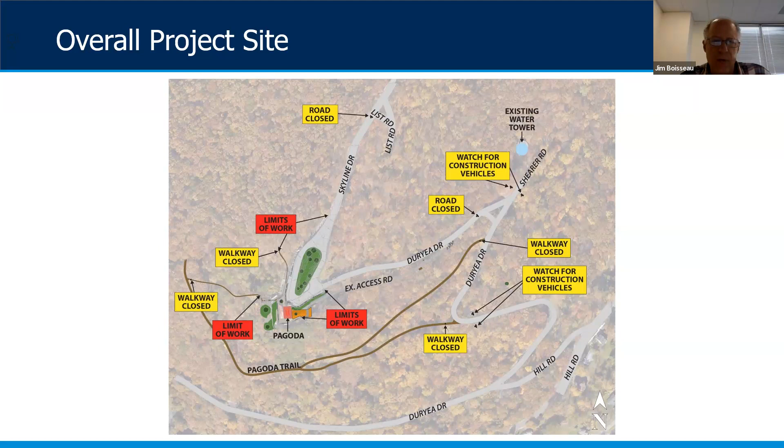So what we're seeing here in this slide is part of what we've been asked to do is to also maintain the construction site, allowing a maintenance of traffic through the site for the contractors, as well as providing access around the site without impacting the overall maneuverability at the top of Mount Penn. So we'd be looking likely at about a 2-year construction time frame to do our work around the Pagoda site.

So we have some road closures, maintenance of traffic for construction vehicles, warning signs, and also maintenance of traffic and closing off the walkways. The reason for this is when we start rehabilitating the site, as we'll see later in a few more slides, we'll be moving large materials around for the restoration of the walls, the stabilization of the walls, and stabilization of the terraces, walkways, and bringing the site back up to code.

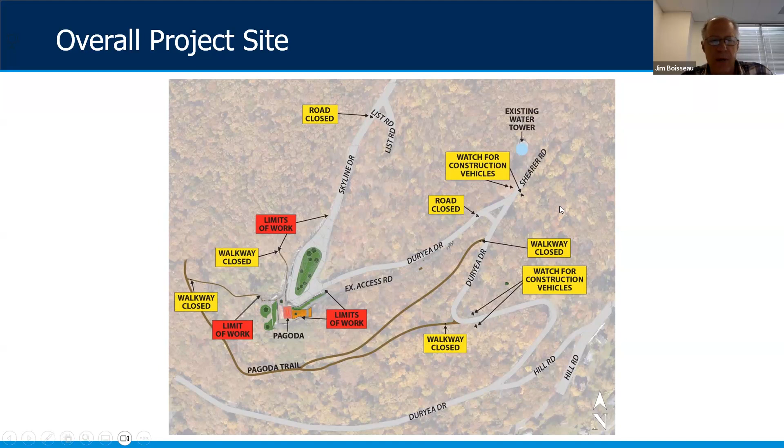So our limits of work are really focused within those red areas that we see, and we'll be starting here. Perfect, Dave, thank you. So now we're drilling down more into the actual Pagoda site itself.

In general terms, we have a number of walls, walls 1 through 5, and it's interesting that each one of those walls is constructed differently and in a different time frame. As we remembered from the postcard, the walls right at the terrace that provide stability for the terrace and around the pagoda, and also part of Skyline Drive, were built back in 1908.

Now why that's important is back in the day, the construction procedures and means and methods provided for a dry laid stone wall, meaning each stone is not mortared together, but they're pinned, and there's space between them. So we're approaching almost 115 years of exposure to weather, water, drainage, and traffic loads on the terrace.

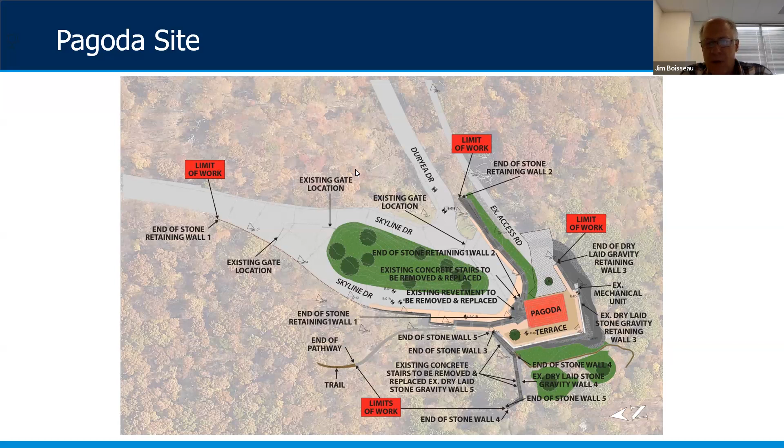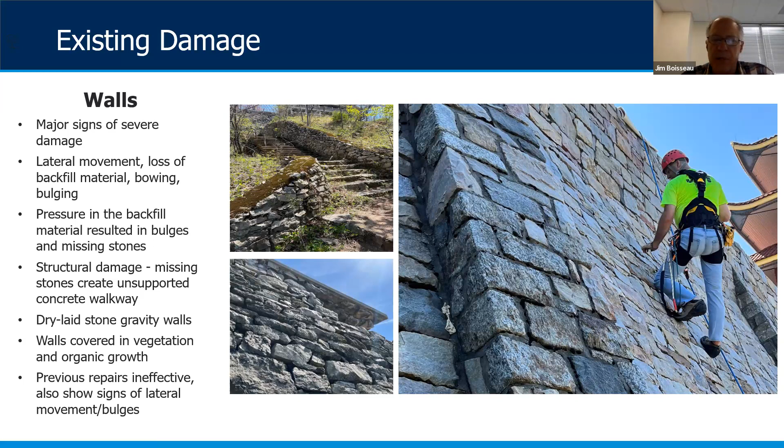The photograph on the right-hand side shows different conditions along these stone walls. This is one of the stone walls built back in the 1970s from an addition where the overlook was constructed. Here we're seeing some mold, some exposure to the environment, but not to the extent of the damage of the dry laid stone walls. There's some changes in the mortars.

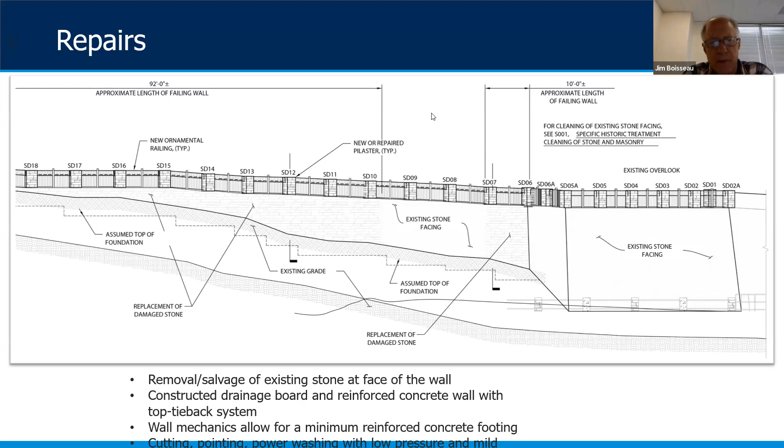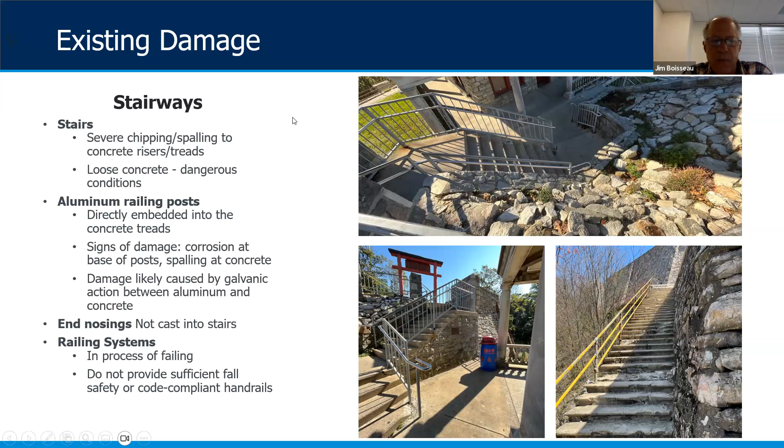One of the assets we have is we're able to take advantage of the existing bedrock. While that's an advantage, it allows us to seat a minimally constructed footing into the bedrock and use that as a key.

And then we can also come back up at the top and place in tiebacks and a new concrete wall. And then once we put in the new concrete wall, we can place stone that we can either salvage from our stone that we take off during the demolition process, or we can manufacture and quarry new stone that matches the existing conditions.

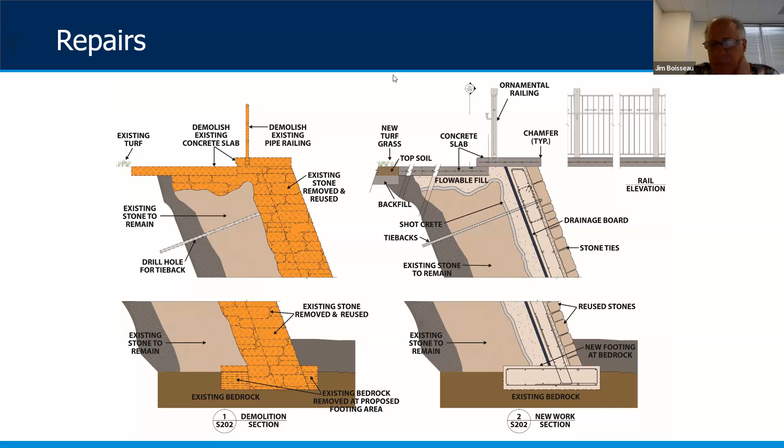So that was my thoughts on the overall project site.

Okay, and we'll move on to Robin. Let me pull that up. Dave, before we move on, do we want to try, maybe Jim can answer the one question that came up about the tiebacks? Sure, if I can see it. Let me get the right thing up here.

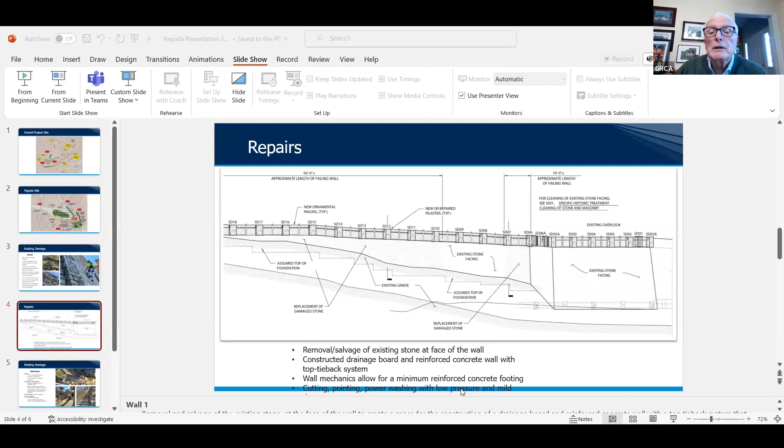The question was, is there any risk or danger of the tiebacks rusting over time and causing damage to the wall? Tiebacks are either threaded in stainless steel or a hot dip galvanized process, so the life of the tiebacks usually exceeds 100 years. We also use them in marine structures.

They're exposed to salt and brackish water. The advantage of the tiebacks also is they're encased in a grout, an epoxy grout, and that epoxy grout also has a corrosion inhibitor admixture to it. So that corrosion inhibiting admixture actually preserves and keeps the corrosion arrested.

One advantage I didn't mention is that locking the tiebacks into the foundation in the stone provides for a very minimally invasive excavation behind the wall. If we had to have a larger footing, we'd have to lay back the excavation or provide some type of sheeting and shoring. With the foundation locked into the stone and the use of tiebacks, it minimizes the excavation during construction.

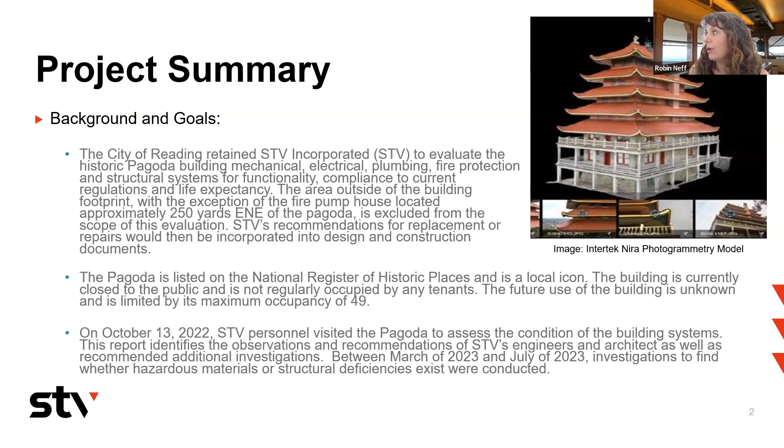So let me start with architecture. We're going to give you a little insight into what the architecture and engineering world is and how we think and present things. First and foremost, architecture from the outside.

Some recommendations and assessments we saw—it's dirty, we need to clean it. That's a maintenance thing that should be done on every building, honestly, although people don't always think about it. So cleaning it, getting the graffiti off.

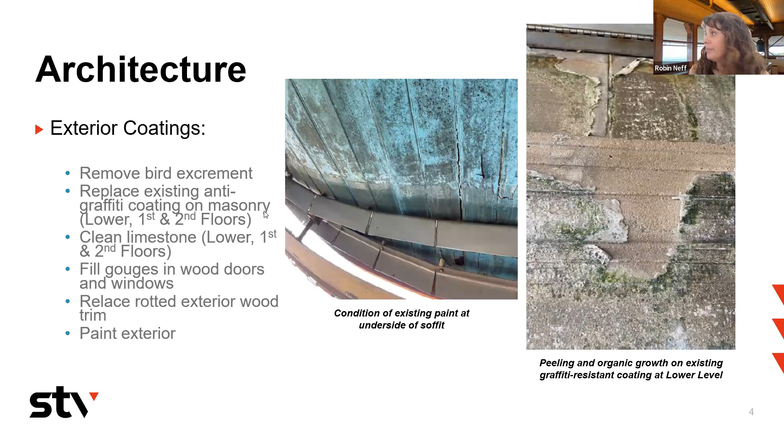There are gouges in the doors and some window sills and things, so we recommend replacing or filling them, and painting the exterior for sure. I'm just going to give you highlights of a lot of these items.

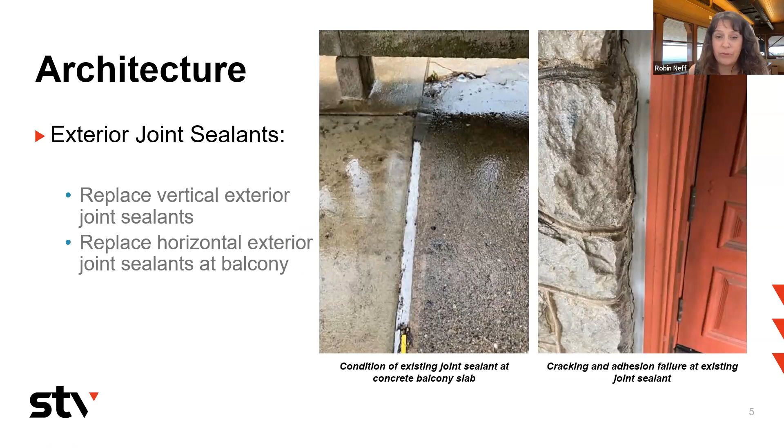Joint sealants are extremely important on a building for waterproofing purposes. When water gets inside a building where you don't want it—we've all seen windows leak and thought, oh my gosh, now this windowsill is rotted and falling apart. Joint sealants are what save your windowsills and other interior elements, so replacing them on a regular basis is highly recommended for waterproofing. That's where we observed some things that need to be taken care of on the pagoda—typical maintenance type items.

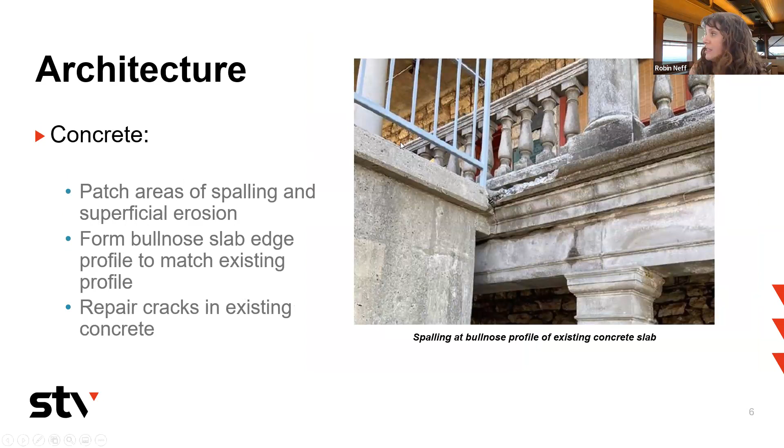Concrete—if you go out there, you see some spalling where concrete falls off, similar to what Jim was saying about the rocks falling off. When water gets behind things, they start to spall. We can fix that, and we do recommend doing that in a few areas. It's not really that bad, but we think there are some areas we need to address.

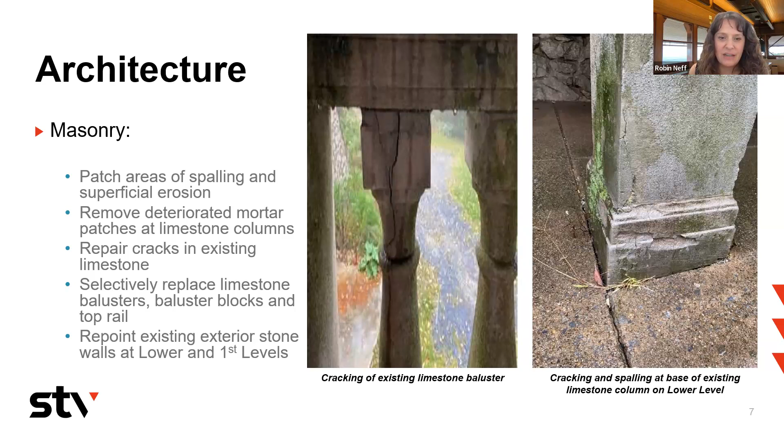Masonry is kind of similar—patching, spalling. Concrete and masonry are a little different in our world. A lot of people call them the same thing in layman's terms, but we did notice some things there. Again, nothing here is a significant issue, but we do need some fixes.

Windows, talking about waterproofing—they're very important for that, as you can imagine, and also very important for interior livability, for nice things to be able to see out the windows. We did notice some leaks, nothing too significant, but we definitely want to make sure those get repaired. We're also looking at a few exterior casings that were missing—again nothing too significant, but we'll definitely repair those sealants.

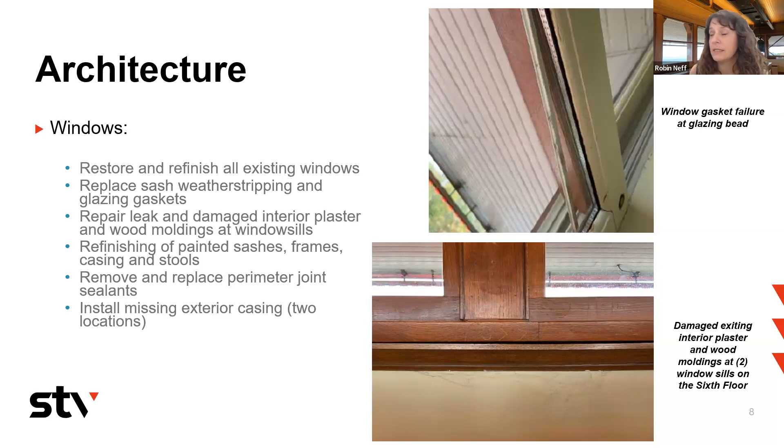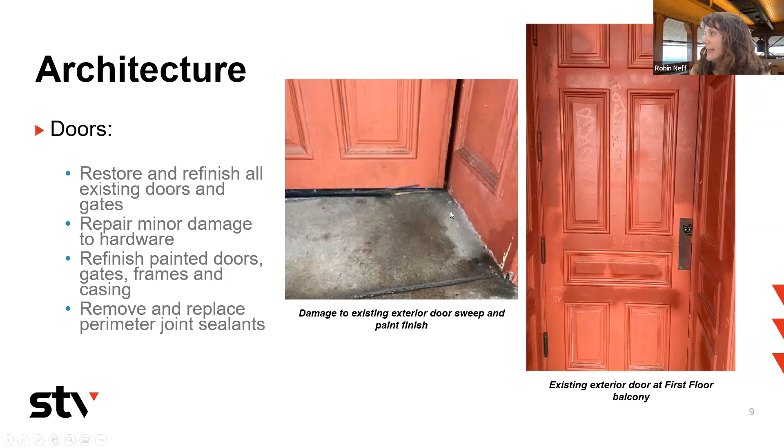Doors—restoring and refinishing. This is a historic structure, so we want to be mindful of that and do everything to honor the history of this building. Restoring and refinishing is the typical way to go—we're not going to replace a lot, we want to restore, refinish, and repair. So we do need some repairs on the doors.

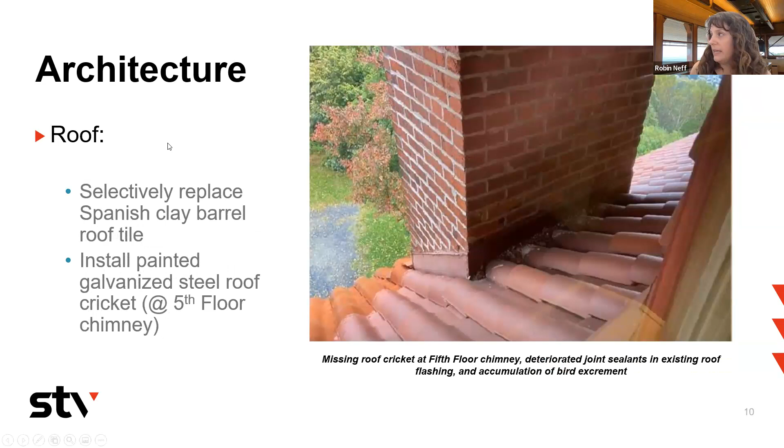This is a tough site. Jim, you had some visualizations of these walls, and obviously we're on a hillside. Accessibility is tough - to be able to get a wheelchair or someone who needs assistance, or stairs are a problem. We don't have an elevator here, so how do we do this? But what we can do in a historic structure is at least get something on the ground level. There could be a larger need to possibly get an accessible entrance with some accessible parking down to the bottom. Not sure how that's all going to work - I'm just throwing out ideas.

But we do recommend that since the restrooms need to be upgraded, we go ahead and make them ADA compliant.

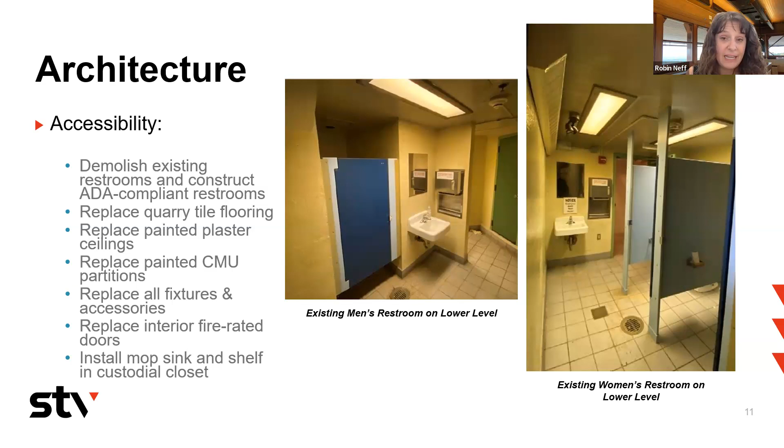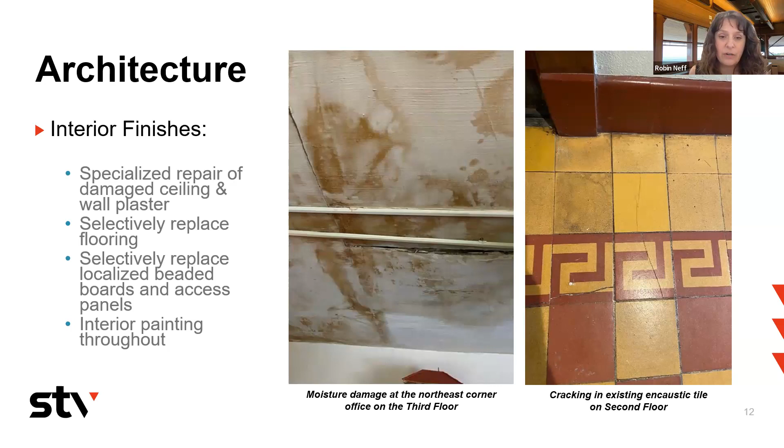Some other miscellaneous items, the kitchen appliances - this goes to, I think I saw a question in the chat earlier about what are we going to do with the Pagoda. That's a great question. I'd love to have the answer as a designer, so we can make this what you guys want it to be, but I don't think we know yet. I think it's still to be determined what we want to do here, so we're going to make it as flexible as possible for that.

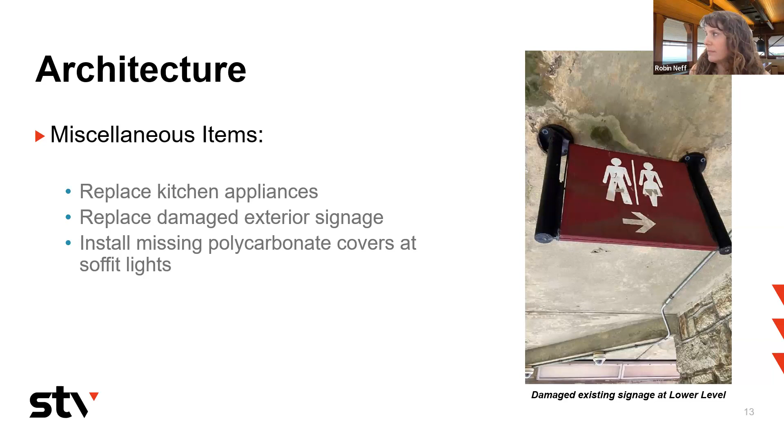So replacing the kitchen appliances, if there's a desire to have a kitchen in there, then we would do that. There's some exterior signage that I think we can upgrade and make more desirable, some lighting repairs as well. So that was our architectural piece.

Structural is our next discipline I'll go over - you're going to see a little bit of duplication here, little nuance differences. Exterior repairs that we're looking for structurally would be cracks. Cracks are a big issue with a lot of things, but none of these cracks seem to be a structural concern, which means we're not anticipating this is going to fall down or fall off the mountain. We feel it is structurally stable. How the building was built, it's anchored into that wall or into the rock there. We are not concerned that this is sliding off the hillside at all.

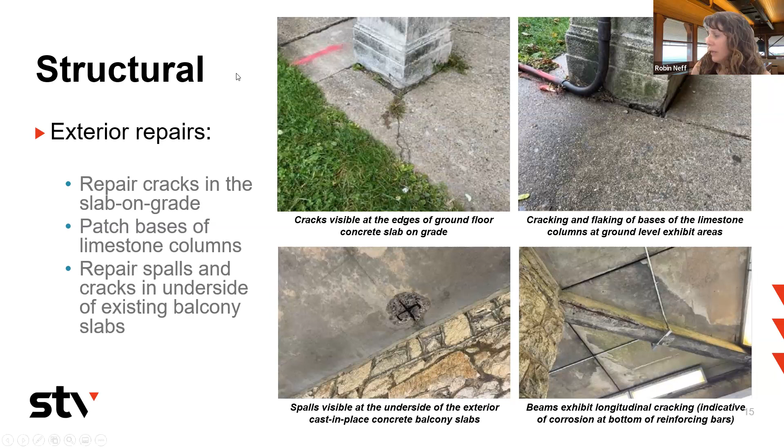These are typical types of structural repairs for cracks - limestone columns crack, flake, those kinds of things. Again, nothing serious on the exterior that we saw. A few other areas we're going to be looking at further as we design.

There's also - sorry, I've got too many screens here - some cracking of the limestone beams. We need to replace, I think, two limestone beams that are structurally deficient. They're not going to fall over today, but they are something we definitely want addressed, because when this thing comes back up and has people in it, we want to make sure it's structurally safe. So that's in our recommendations, to replace those.

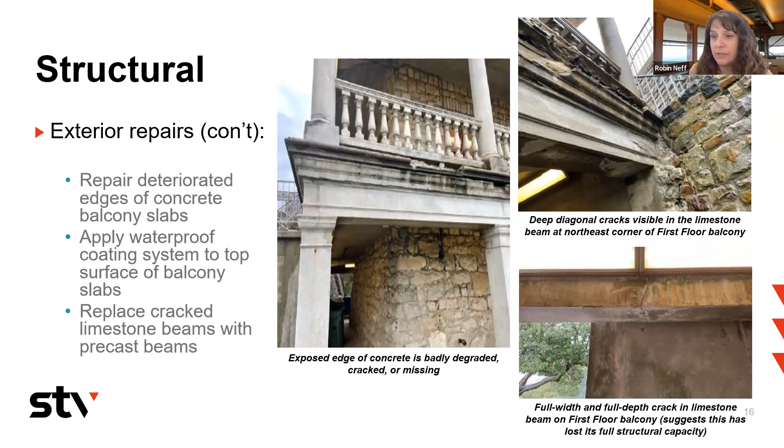We are recommending the replacement be with precast beams as opposed to limestone beams. Precast is a much more sound engineering technology than a piece of stone, and we can make it look very, very similar. We've done this in other historic projects, using precast instead of limestone - you basically can't tell the difference from the exterior, but it's much more reliable from a structural perspective.

In the interior, up on the third floor, sixth floor, which I have my picture behind me, this is in the observation area. There's a bit of uncomfortableness when I was walking up there. It seems like you feel like the floor is kind of tilting.

So we actually did some investigation in there. We took out some ceiling, looked to see what the structure looks like to determine if this thing is going to fall down, and we did not find any evidence of structural deficiency. It actually looks like there was a repair in some state. We don't know when, but definitely since 1908 there was a repair for some kind of structure. We were assuming structural deficiency previously, but this is just something that wasn't fixed at that time.

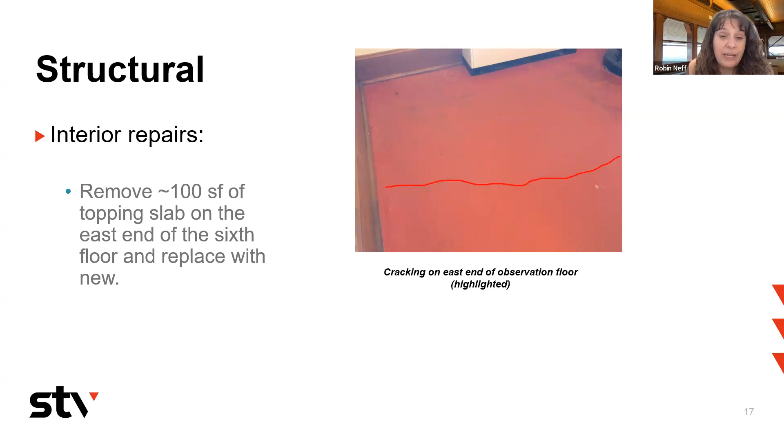So there will be some more superficial type of repair to make sure that uncomfortableness of feeling this tilting is not there anymore.

Mechanically, mechanical systems, it's got to be heated, we want it cooled. When we were there in July, it was a hot day. It was tough, and without having that cooling in there, going up and down those stairs was not fun, I'll tell you that right now.

So we'll start with heating. Heating, of course, is important. The heating system there definitely needs to be replaced. It appears to have been installed in 1990. It's not high efficiency, absolutely not. We are recommending it be replaced with a high efficiency propane-fired condensing type boiler.

We will need a propane tank, but that can be buried outside. We do not need to have that be visible. So that is how we're—oh, I'm so sorry.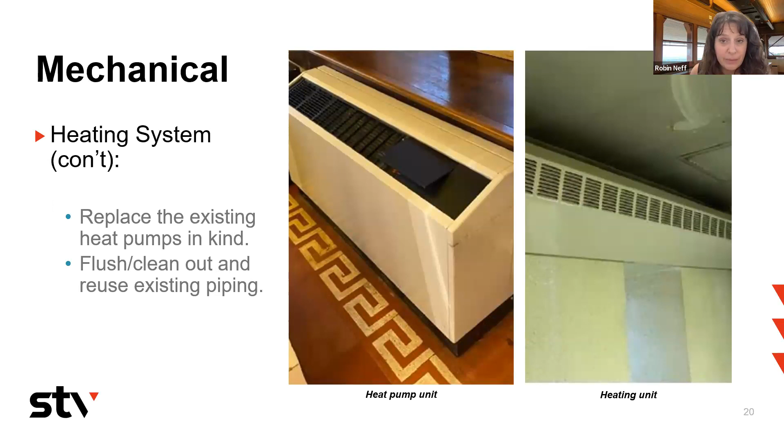This is how we're going to replace it in kind, and we're going to go ahead and reuse these pipings there. So that actually saves some costs. If we flush it out and reuse it, it's perfectly fine. The piping is in good condition as far as we can tell.

Regarding the cooling system, this is something Jim, I don't know if anyone else picked up on it. He had a little box on his one overview there that had this mechanical unit in there. So we will definitely need to have coordination between the two aspects of this project.

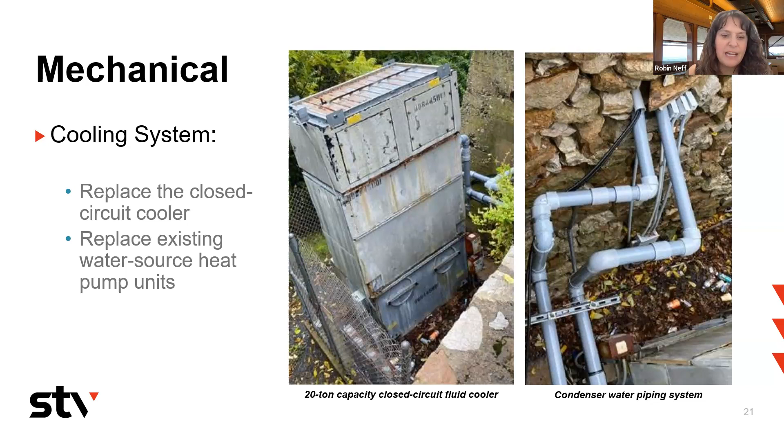We are recommending this be replaced. We will have to figure out where to put that in relation to the wall as it's being repaired, as the walls are being rebuilt. But do we maybe put this somewhere else? That's details you guys don't really need to worry yourselves about.

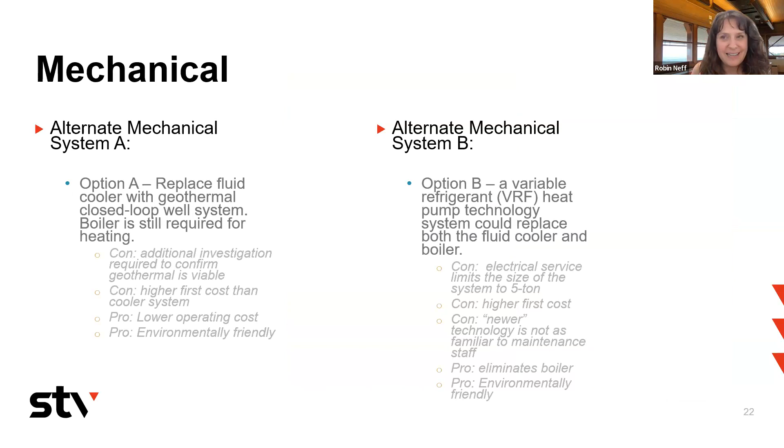This is what I was talking about, alternates. I will skip that. I just got that email yesterday, so we didn't get a chance to update our slides.

Plumbing systems relate back mostly to the restrooms that I talked about. Plumbing is not going to be an extensive repair for this project. We do need some replacement just for maintenance, typical maintenance type things with a water heater. In our homes, we all know water heaters go after 10 years. It's the same in any kind of commercial building. They last a little longer, but they still need to be replaced on a regular basis.

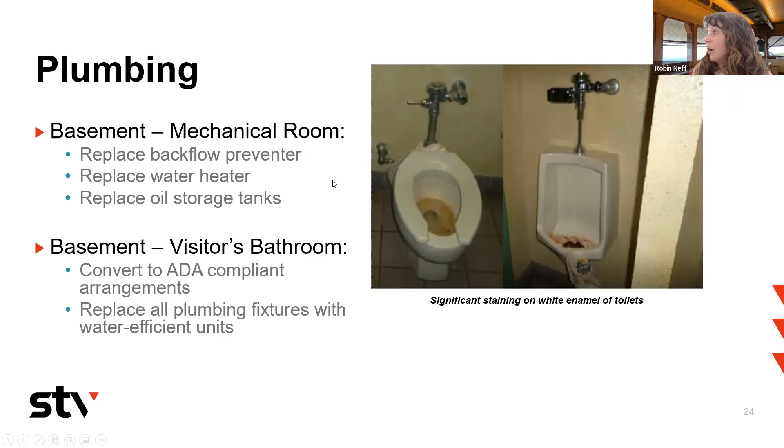Backflow preventer needs to be replaced, and then the oil storage tanks—that's dependent on the type of system we use. If we use propane, then we don't need the oil storage tanks, so we'll be figuring that out. And then we are recommending to replace all the plumbing fixtures with water efficient units in this building.

Fire protection, it is a sprinklered building, which is good. In the basement, there's also an employee toilet and wash sink.

We are recommending that be replaced. First floor prep area, again with the kitchen aspect of it—if we're keeping a kitchen aspect, then we would recommend that the sink and the hand wash sink be replaced.

There is a kitchenette area on the second floor. If that's going to stay as a kitchenette area, we would replace those.

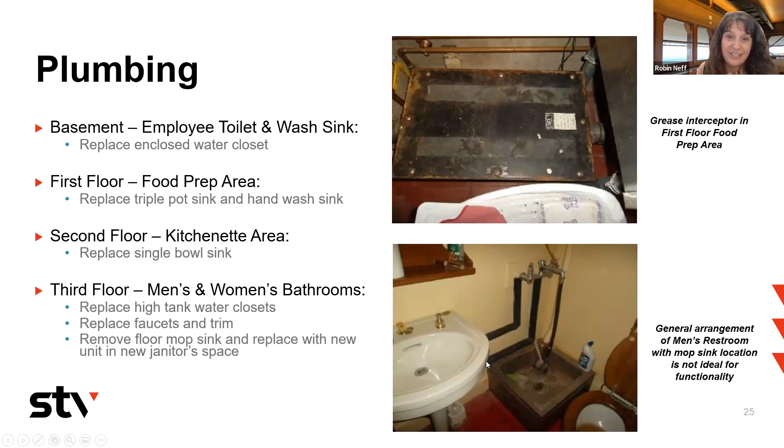Then third floor bathrooms. We have a picture of this bathroom on the third floor, where there's a janitor's closet mop sink in there. So we have an idea of how to fix that and not have it in the bathroom. I think that would be a good feature to not have.

Now I can go to fire protection. As I said, it is a wet sprinkler system already. There is a fire pump down the road a little bit, in good condition with no issues that we saw. It's been well maintained, only about 10 years old, so that's great - those things can last 50 years. So we don't have any recommendations there.

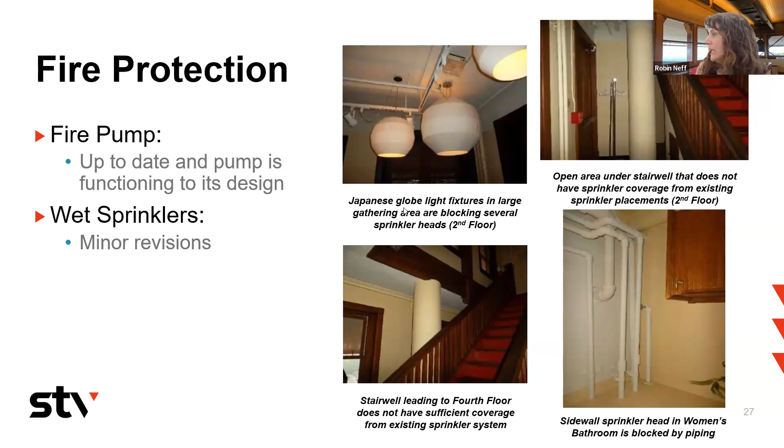Our recommendations for fire protection are pretty minor. We've got a few areas where, in design, you don't want to block heads - safety first, got to make sure this is a safe building. So a few areas where we need to make improvements, and a few areas where the heads were somehow removed. We want to make sure we get those back in there.

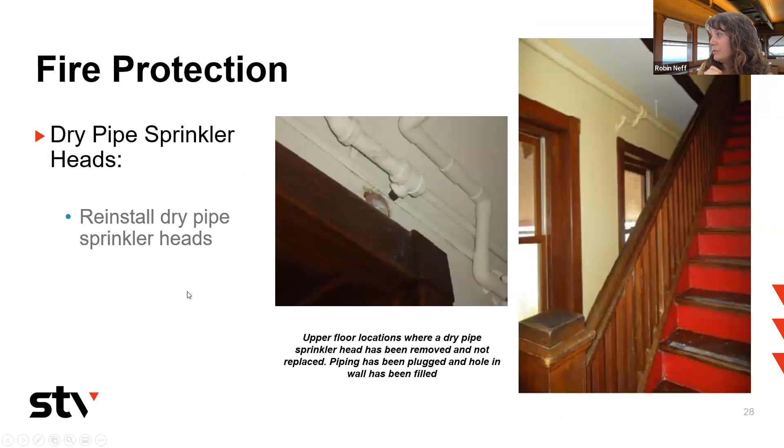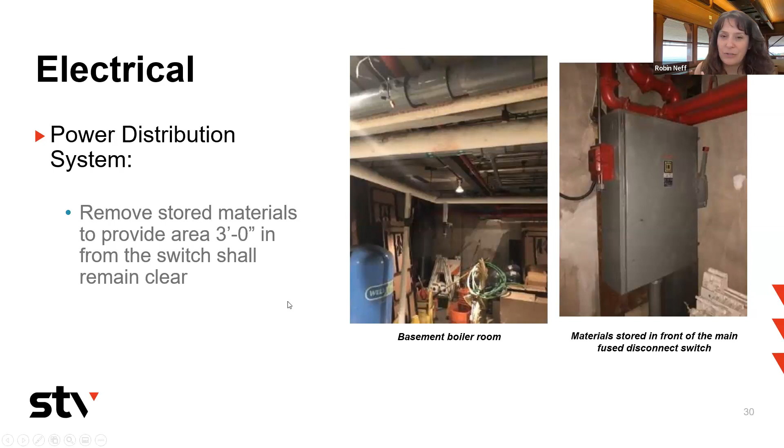Very minor. Electrical - sure, everyone's been waiting to hear about the lights. I'm getting there, I promise. The power distribution system, that's how we get the power there - that's all that means. We really didn't see any issues with it, but there are stored materials there, and that's not allowed per code, so we want to make sure that gets remedied.

Some other minor things - we've got some wireways, exposed wires that aren't per code. We've got some areas where cabling is going through holes in the wall with no kind of water sealant or water tightness. Definitely want to try to get those repaired.

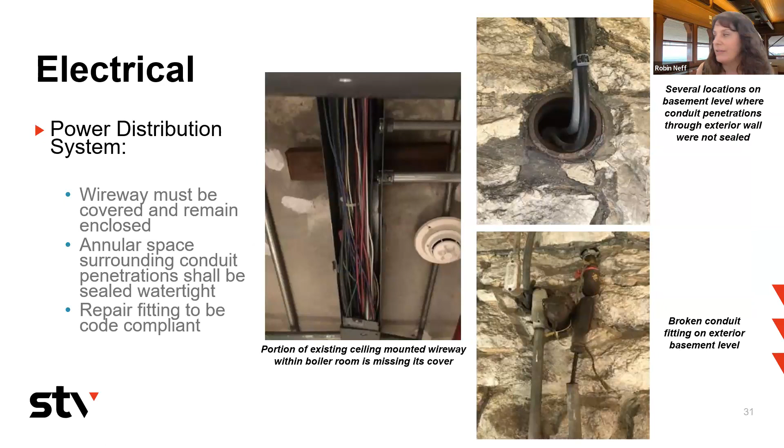Starting with the lighting system here, going interior first, there are needs to replace lighting. We're recommending to replace all of the lighting throughout the building with LED, more efficient lighting.

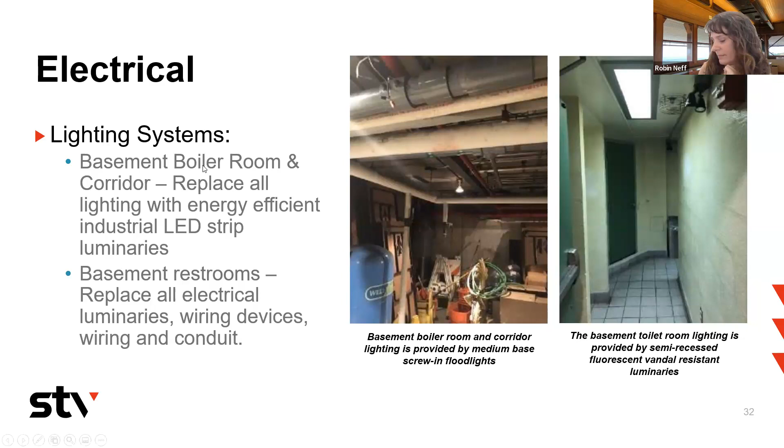So that's just a couple of pictures of the types. We're certainly amenable to putting similar lights, lantern fixtures or something else to highlight certain areas. That'll be in coordination with the city as to design and what they look like, and it depends on how flexible we want the space. We don't want to put lanterns up in the middle of an area that aren't really there for a purpose, so we want to be smart with where we put things.

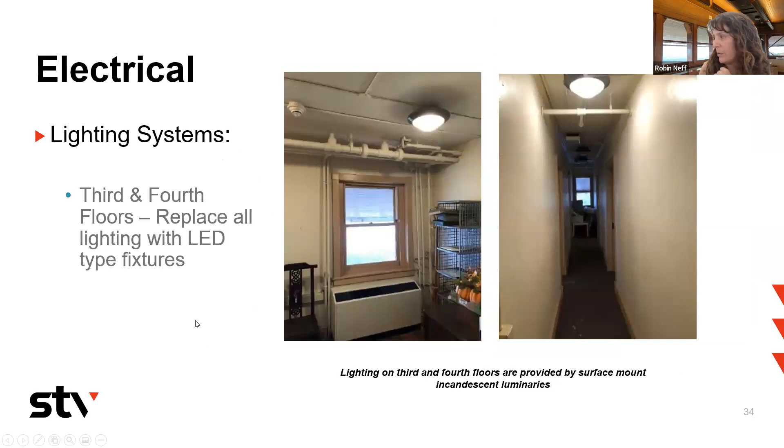Fifth and sixth floors, again just replaced with LED type of technology. And on the exterior, bottom up - everyone's been waiting for what we're doing with the lights - there are some at the bottom level. Again, safety - we want to make sure this is a lit, safe space for people, and we are recommending they be replaced on the outside as well. There's a few that just need to be retrofit because we want to keep the look historically, so we're going to retrofit them with LED.

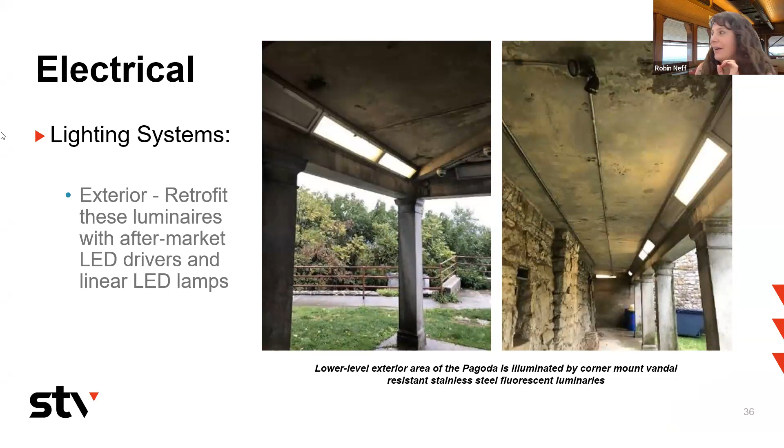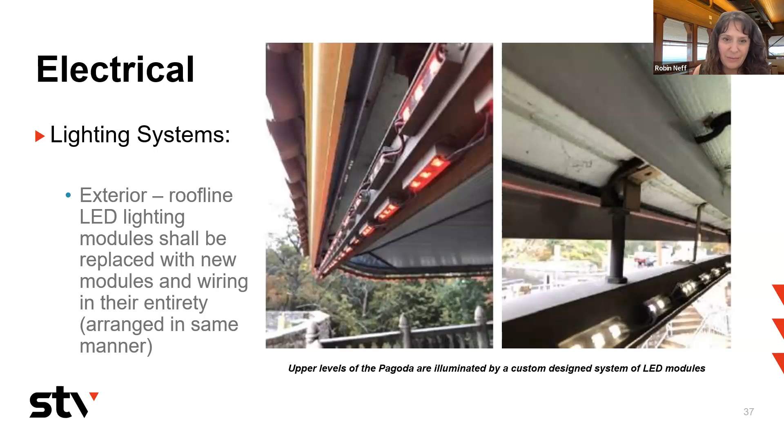Here, drum roll - roofline, the LED lighting, everyone knows about the Pagoda. We do recommend that it be replaced. We're looking to put in a full custom design system, LED modules with all new wiring. What we're going to be able to do here is have it programmable - we'll be able to do whatever colors you want at any time, make them pastels for springtime or fall colors in the fall. On Christmas Eve, of course, we'll be able to do flashing reds and greens and whatever we want to do. That is a recommendation.

Now back to the boring stuff - emergency lighting needs to be all replaced throughout. So that was the lighting.

Also CCTV - we know that this is an area that is kind of remote, so we want to make sure that's hooked up and is working.

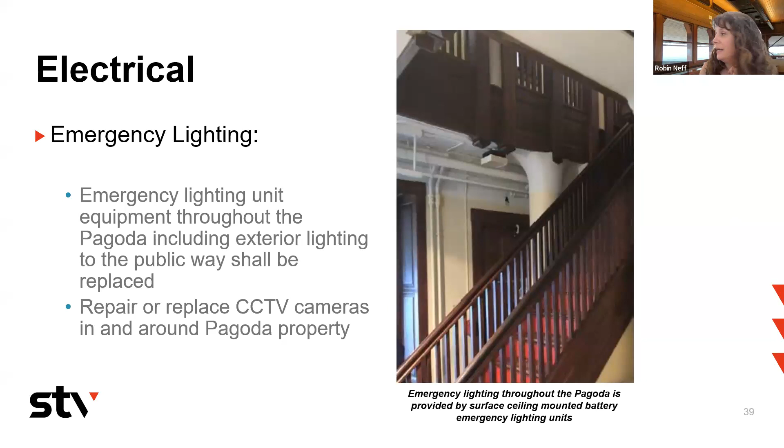Some additional investigation - I mentioned hazardous materials. You may all be interested in what we found. We did not find anything we didn't really expect. We do assume there's some asbestos in there, but primarily the ceilings are not asbestos. This is not going to be a very intensive project to have to remove hazardous materials.

There is certainly lead in the paint. Anything prior to 1970, 1980 really is going to have lead in the paint. So it's a concern, it's something we have to address, but it's not a primary thing.

Asbestos is a little more significant, and it's not that there isn't any, it's just that we didn't find it nearly as much as I would have assumed in a building of this vintage. And we do have polychlorinated biphenyls, that's also not very typical in a structure of this age. But it is definitely able to be remedied.

And I already touched on our 6th floor investigation there with the sloping floor, and we very surprisingly, honestly, we're happy to see that something was already repaired, and it looks like we're not really in any kind of danger there.

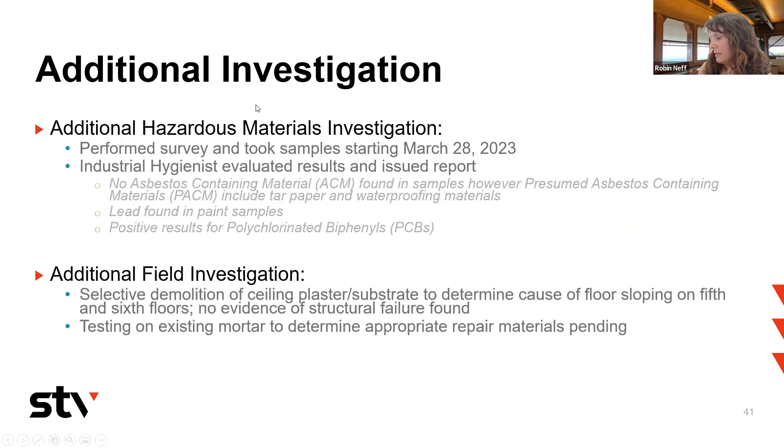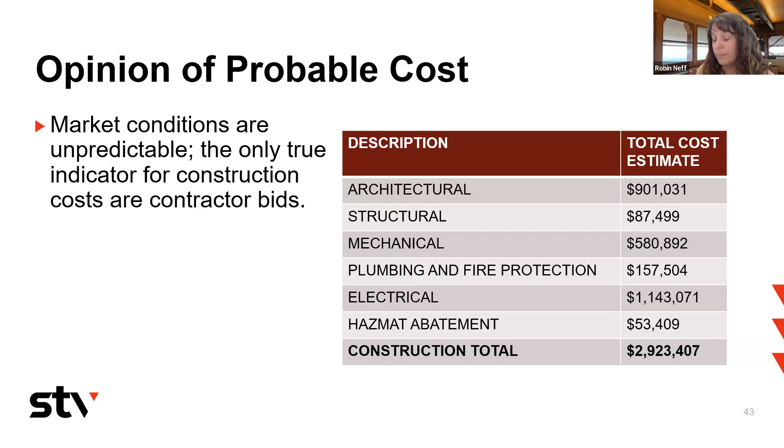That's our estimate. So our next steps is to continue with design. Now that I have my answer on the mechanical stuff, we're ready to go. We're ready to rock and roll into design and put together construction documents.

So Dave, stop sharing screens and I'll pull us up. Yes, sir. I can figure it out. Nope, I don't want to do that. How do I stop share? There you go. Okay. Or do I get a mic?